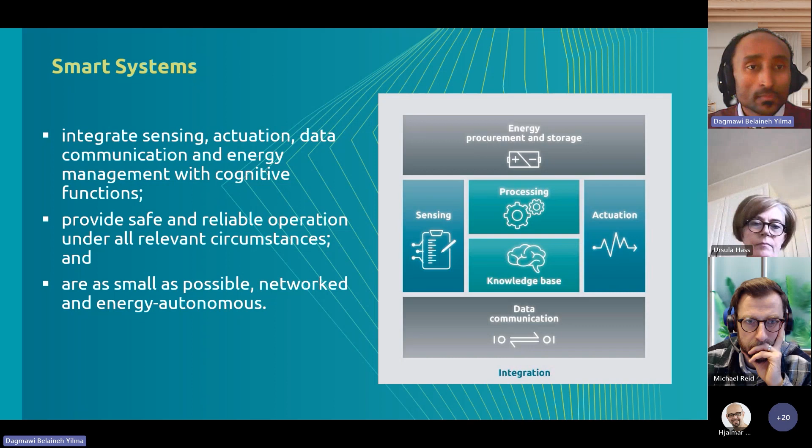In terms of the European context, EPoSS does a lot of input. It makes research priorities, writes SRAs (strategic research agendas), and defines roadmaps for where Europe as a whole should go in terms of green electronics and other electronic systems as well.

There is the capacity to acquire expert knowledge and develop infrastructure for knowledge development, and EPoSS also advises policy approaches. Based on that, EPoSS has had influence and a range of activities, including the KDT, Horizon Europe, making alliances, and of course making a lot of events and initiatives to promote sustainability in electronics.

There are a range of working groups and task forces in EPoSS, in total 8. Here I talk about key technologies, green ECS, AI at the edge, and transportation. The task force directly responsible for writing this white paper is the green ECS, focused on where we are in terms of global context.

Also, today, are we looking at cradle to gate? Are we looking at cradle to cradle? And how can we improve that by incorporating a design model that promotes green electronics? One of the very big focuses of the paper was also how can we extend product lifetime through repair, for example.

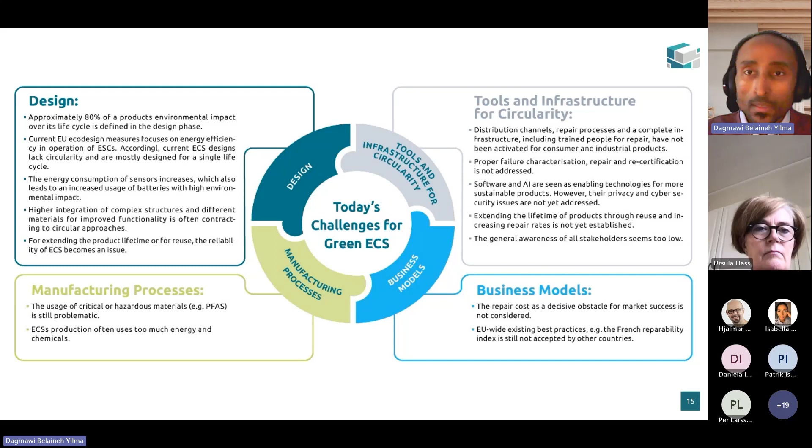In terms of business models, we have a very linear business model still. Circularity is not a model in a lot of products, and it's important to have an EU-wide regulation to also facilitate this. In terms of tools and infrastructure, there is lack of clear distribution channels, lack of knowledge, lack of transparency, and also - it's getting better - but in terms of software and AI usage, there is also a lot to do to promote green ECS.

One thing we clearly identified was that when we talk about green electronics components and systems, there is green of electronics and green by electronics. Green of electronics strictly refers to the electronic products themselves: what materials are used, how much energy they consume, are they high-end, efficient, sufficient for the task at hand. So it's really looking at the product itself.

On the other hand, we have electronics itself facilitating sustainability, for example through environmental monitoring, using teleconferencing to reduce transportation and thereby greenhouse gas emissions, and reducing waste and release of hazardous environmental materials. So we have to keep an eye on both aspects, because it's a double advantage if we're able to utilize both.

Next, I'll discuss briefly the environmental context of how the paper defines where we are. There is a huge generation of e-waste - as of 2019 it's more than 53.6 million tons, with an estimate of around 2% growth per year. By 2030, it's expected to be more than 70 million tons. The most unfortunate part is globally only around 17.4% is recycled, and 82.6% is wasted, meaning a lot of CFCs, brominated substances, and mercury are released into the environment, along with a loss of raw materials estimated at around 60 billion USD.

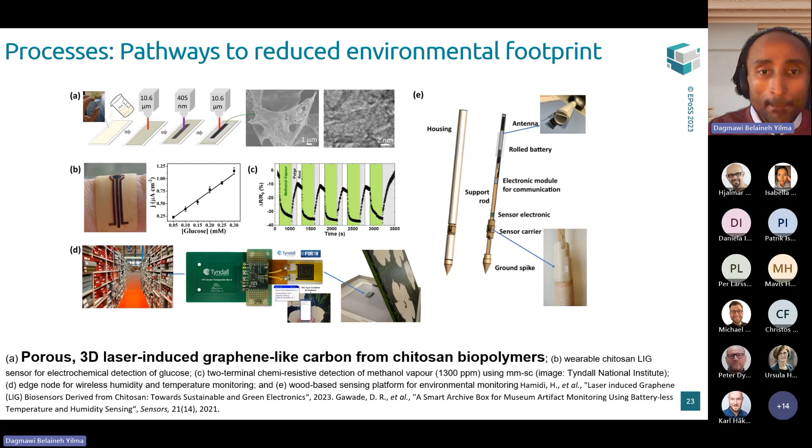One other aspect highlighted in the paper is the use of life cycle assessments, which is becoming more and more used in the electronics industry. It was less so before, it was quite big in the construction industry, but now it's also becoming more useful and used in electronics components and systems analysis, which is quite positive.

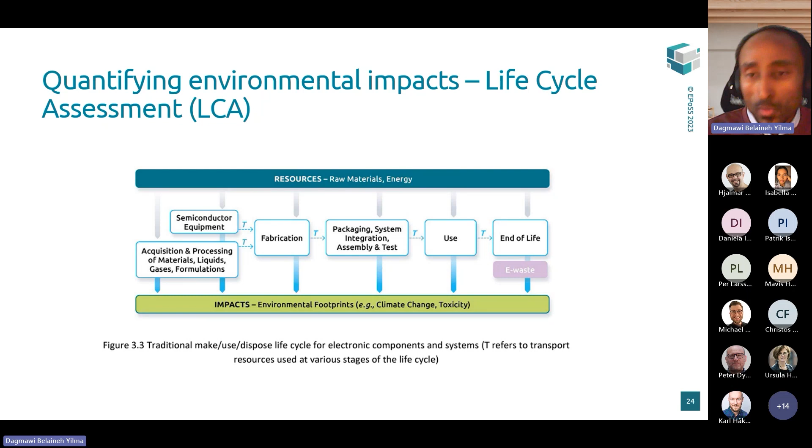The ISO defines 16 environmental impact categories, and each product can be assessed and analyzed based on these categories to see if it's sustainable, more sustainable, or less sustainable compared to other products.

Another aspect of the paper was how we can use design from the get-go to promote green electronics, as design is one critical factor. For that, there is this 9R framework that was developed, I think, in the early... 2016.

It has 10 words with R's, which starts with refuse, meaning: do we need this? Is it safe? Is it sustainable? One discussion there, an example, is PFAS, all the way to recycling and recovering.

Some of the words involve a lot of semantics, so we had a lot of discussions and debates on, for example, what repair is and what refurbish is. Is it a third party that does the maintenance, or is it the primary vendor? There was a lot of discussion, so I'll quickly try to categorize them into their strategic domains.

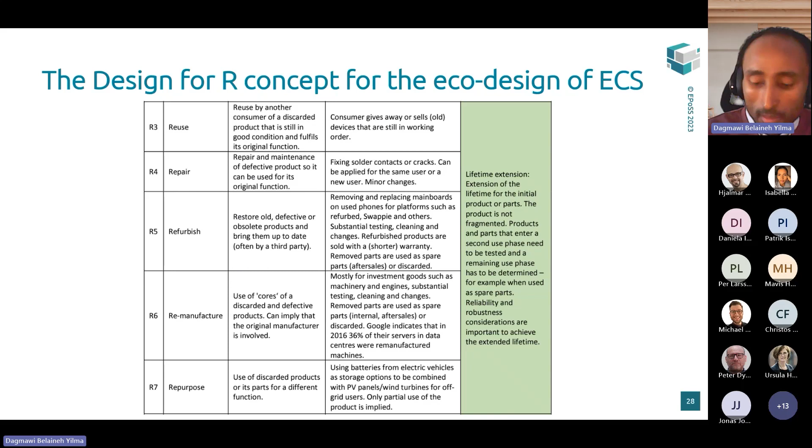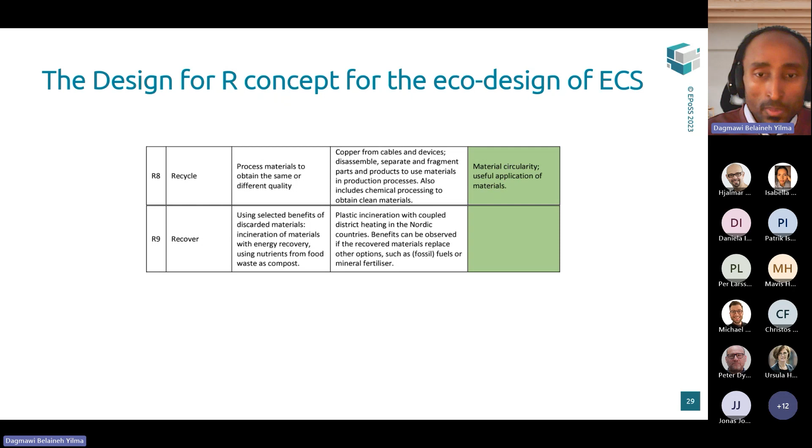So these five R's specifically address how we can extend the lifetime of products. The last two, recycle and recover, focus more on the design of circularity. Recycling, I'll come to it later, is also one of the main things addressed, and repairing is another aspect that's quite well identified in the paper with details. So here we talk about material circularity.

From the previous image I showed on LCA, we now move on using this R framework to a much more elaborate structure for doing life cycle assessments. Now we have resources going in from the beginning, from materials processing, manufacturing, packaging, use, end of life. But now we have other arrows going - for example, if we're repairing at end of use, we can bring it back to use, or we can refurbish and bring it back to another stage, or repurpose or remanufacture to bring it to the previous stage.

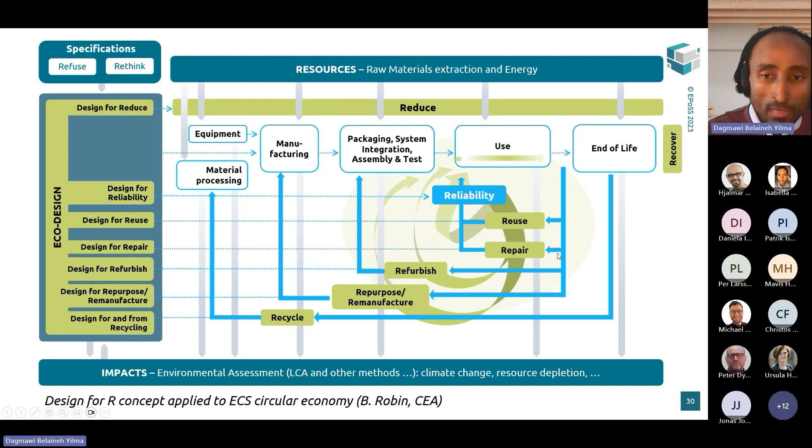Now we have much more options to actually have circularity. So instead of the linear paths we've been taking, using this R framework we have a very good strategy to rely on to facilitate this circularity. Reliability is another R word, but it's not part of this 9R framework - it permeates throughout the R framework. Whatever we do in this R framework is to make the product more reliable, so it can be considered an umbrella.

So at the end, what recommendations does this paper have for the transformation towards green electronics? I'll address again the same aspects: design, manufacturing processes, business models, tools and infrastructures for circularity. In terms of design, it's clear we need to reduce and replace hazardous materials, for example PFAS, and reduce the use of critical raw materials or rare earth materials. We need to incorporate LCAs from the design phase so we can identify hotspots from the beginning and make changes, along with a range of other recommendations, including the 9R framework.

For manufacturing processes, there are good signs that things are improving, but there are still a lot of improvements recommended in terms of using renewable and bio-based materials and maximizing energy efficiency. In terms of business models, we need to increase repair and also establish a repair index, for example as inspired by the French repairability index.

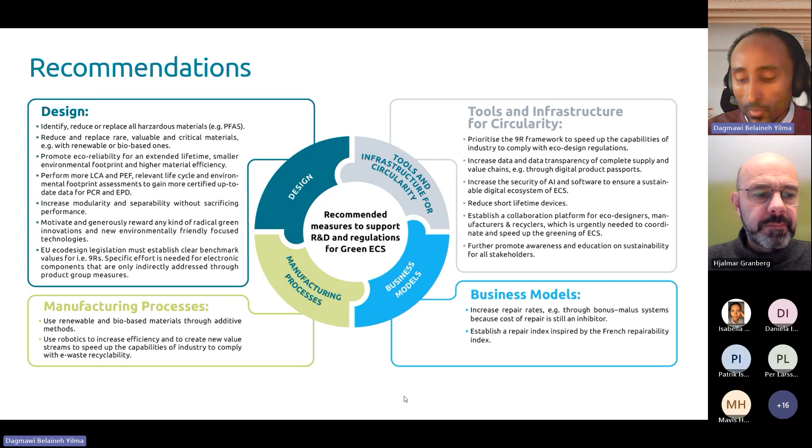And one thing, as I mentioned earlier, that was focused on was repair. When we talk about repair, it has three aspects. It starts with characterizing what's wrong with the product and why it needs repair, then actually repairing the product, and recharacterizing it so that it's ready for use again.

The main obstacles in characterization are, for example, complexity of the product, knowledge of the person doing the repair, and intellectual property, where a lot of things are shrouded in secrecy because of financial motives. In terms of repair, knowledge is still an issue, and cost is another issue. The cost of repair should not be larger than the cost of the new product.

And recharacterization has problems of warranty and proof of repair. But the drivers here are transparency in terms of characterization, having more information, bonus systems for repairability, and so on. In the actual repair, we need a business model which has repair as a business itself. Availability of spare parts is very important, and products should already be designed for repair from the get-go, having modularity as part of the design process.

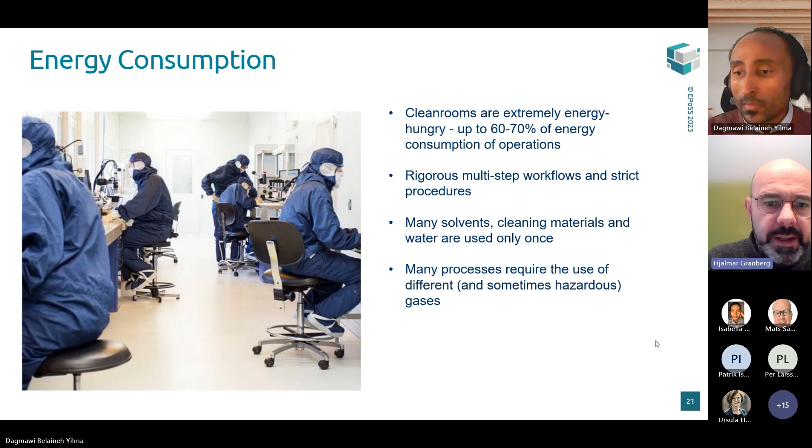But when it comes to sustainable, why is this more sustainable? I have the same question at hand, but I would like to ask you. Yeah, of course. So one thing...

When doing a life cycle assessment, the answer is always it depends. So the question is, it's bio-based and biodegradable. Is it sustainable? The answer is it depends. So it depends on how it's produced, on the actual energy consumption, and what kind of chemicals are actually going into the process. But in terms of environmental friendliness as an end product, it's more sustainable.

So I understand where you're coming from. So it's not clear cut to say it's more sustainable. But maybe I can rephrase myself a bit. You were also talking about the 9 R's, which is actually 10 R's if you count them. And I wonder if you... It's another debate.

Yeah, but if you're including bio-based materials with electronics, does that increase recyclability or decrease recyclability?

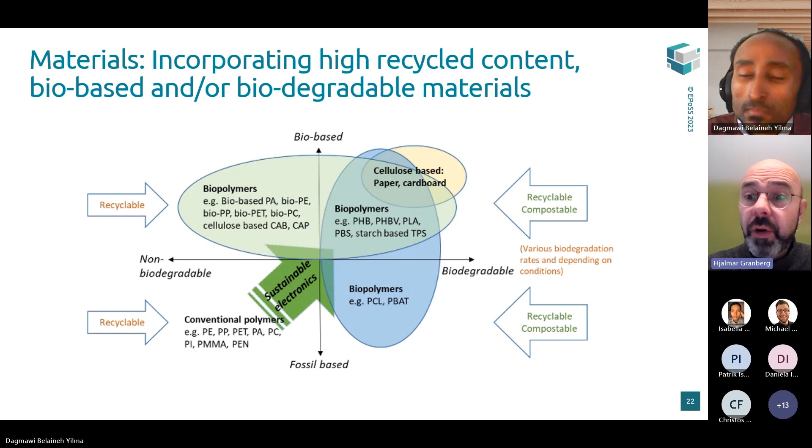Also, when it comes to blind spots—now you've been working on the holistic page, as I see it—is there anything that you left out that we could dig into from the DCC?

Yeah, I mean, I think we try to address a lot of aspects. I can go back to the different task forces, and for sure we have not addressed everything. If you look at all these task forces—key technologies, AI, transportation—we have mentioned them, but it's things like how AI can transform green electronics that hasn't been addressed.

In 2021, the strategic research and innovation agenda was written by EPoSS, but the big AI explosion happened actually late last year, beginning of this year. So there needs to be an update on where we are now in terms of the current explosion of ChatGPT and so on. So not everything—there's still a lot of room for expanding the document.

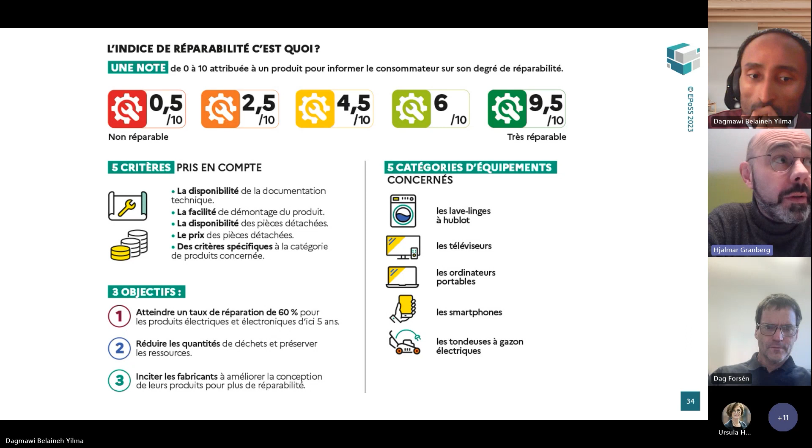Is there any other kind of index you need? Recyclability index, for example. Today there is a need to recycle more than 50% of electronics, so depending on how you design your equipment, you can increase or decrease this recyclability. What the paper also proposes is that there is a clear guideline using this 10R, 9R framework, so that there is regulation for each aspect — how much should be recovered, recycled, or repurposed. So it's having a clear design plan from the get-go as a legislative requirement.

That will even take longer because there is also no clear example. The French repairability index is quite good because the French government has been proactive and started it. So there's also a need — what can the DCC do? I think being proactive and coming up with standards and being an example is very important.

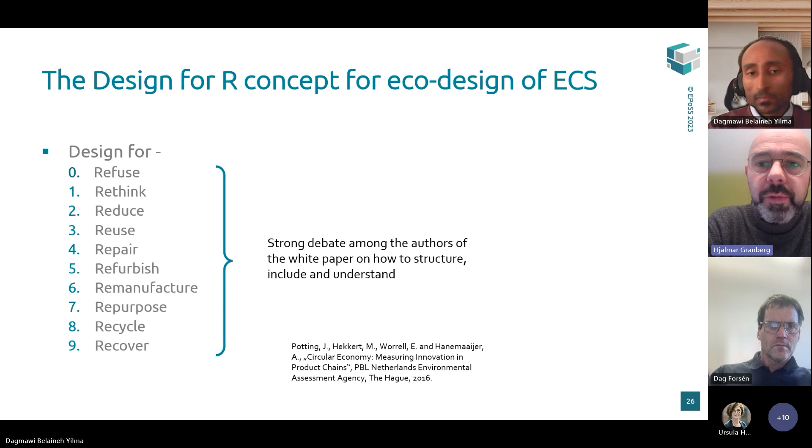And I think those are some good ending words — to be proactive and come up with ideas for new standards, maybe that's one of the roles for the DCC.